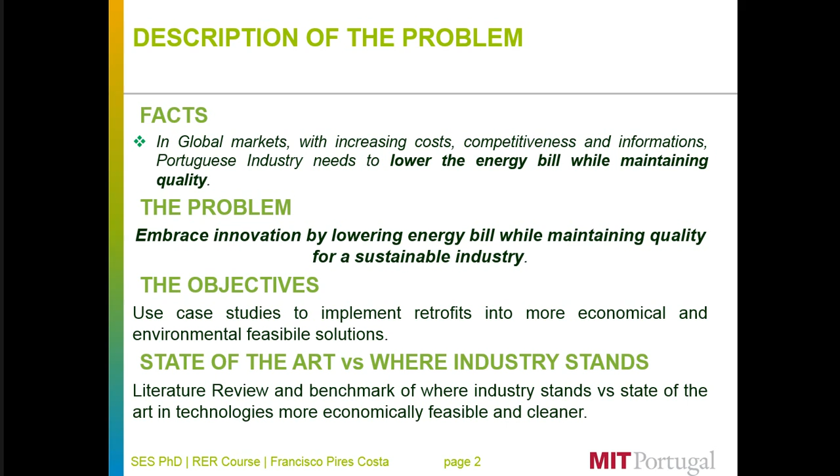Description of the problem: facts. In global markets with increasing costs, competitiveness and information, Portuguese industry needs to lower the energy bill while maintaining quality. The problem is to embrace innovation. The objectives are to use case studies to implement retrofits into more economical and environmentally feasible solutions, using state-of-the-art versus where industry stands to choose the optimal solutions.

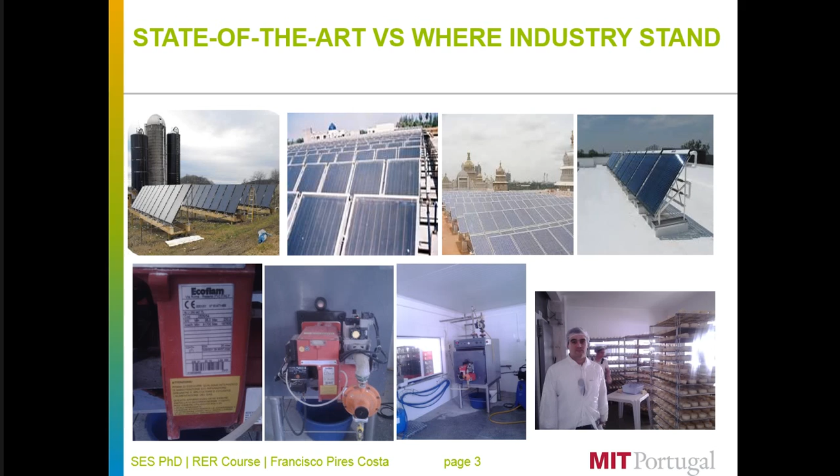The methodology involved choosing two case study analyses, technology benchmarking, net value costs and economical feasibility, greenhouse gas emissions for environmental feasibility, and simulation by manufacturer versus calculation for sizing validation. Conclusions.

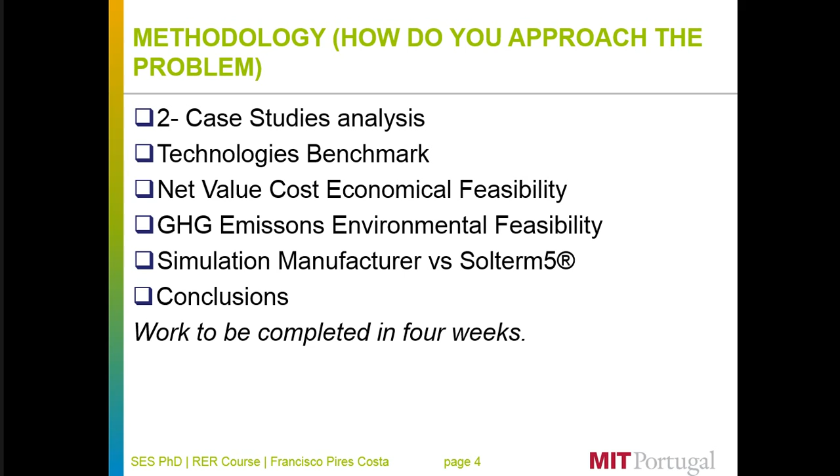We had to assess the industry in Portugal, mainly the industry with meaning in terms of micro and medium companies. Especially, we chose industries linked to rural areas.

Milk producing industry and cheese producing industry were chosen. For the milk producing industry, the representative case was Herdade das Pedras no Redondo, which uses electricity by Joule effect water heating to satisfy their daily hot water consumption needs of 5,000 liters per day at 60 degrees centigrade. Applications include milk tanks, floor, animal stable, and daily cleaning.

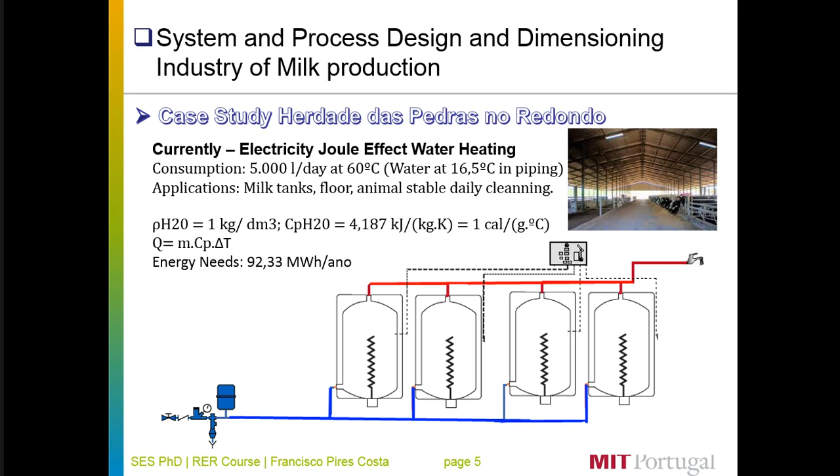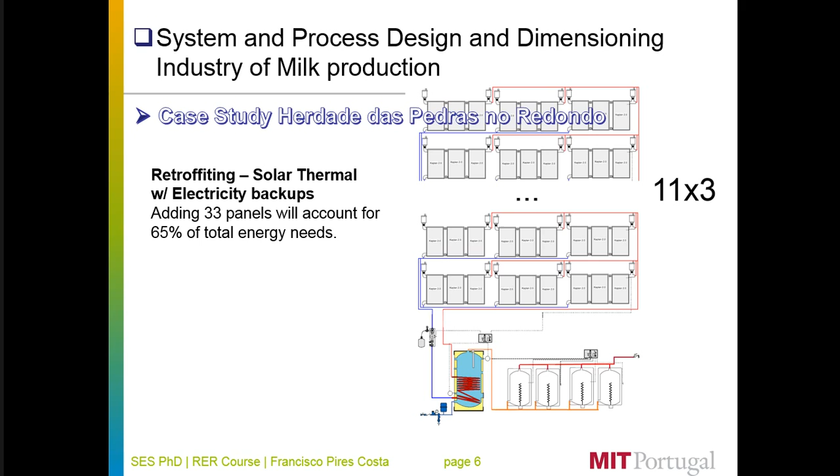The retrofit solution aims to add solar thermal panels that account for 65% of total energy needs, using the previous energy source, electricity, only as backup. So the system now works on a more renewable approach.

Regarding the other case study for cheese producing industry, it was represented by Queijaria Cachopas. Currently they use propane gas, liquefied petroleum gas, for water heating with the same consumption.

This consumption pattern is basically equal, not surprisingly, because as I saw in the field, although they are slightly different industries, the applications of hot water are basically for sanitation purposes, and this justifies the fact that the consumption levels are very similar.

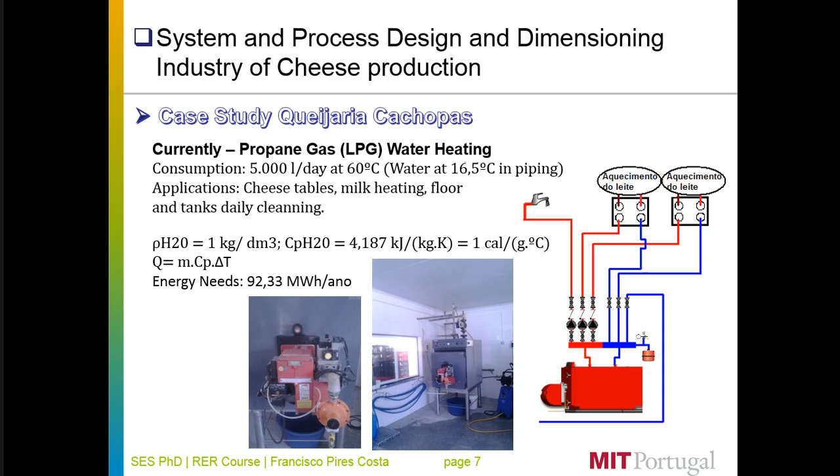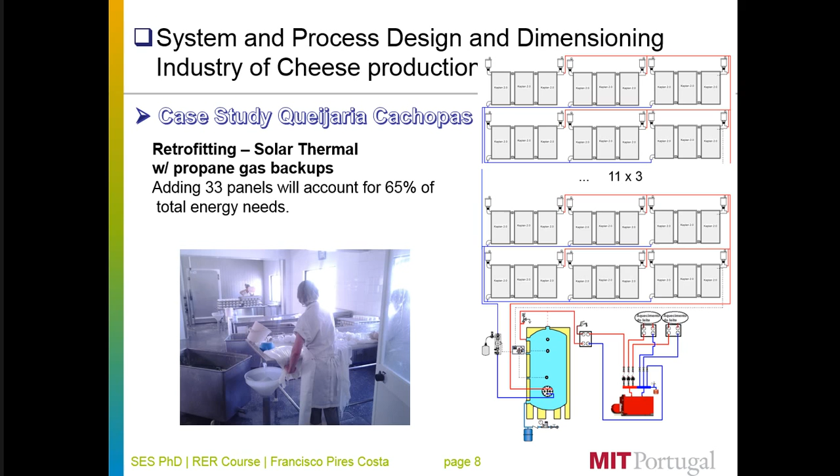Again, the difference is that they are using a propane gas boiler. The retrofit system would also add solar panels, accounting for 65% of total energy needs, with a backup energy source of propane gas.

So we have set the case studies that represent the desired industries. Now let's see the literature review, the available technologies, and how they behave economically and environmentally. The first technology to be seen...

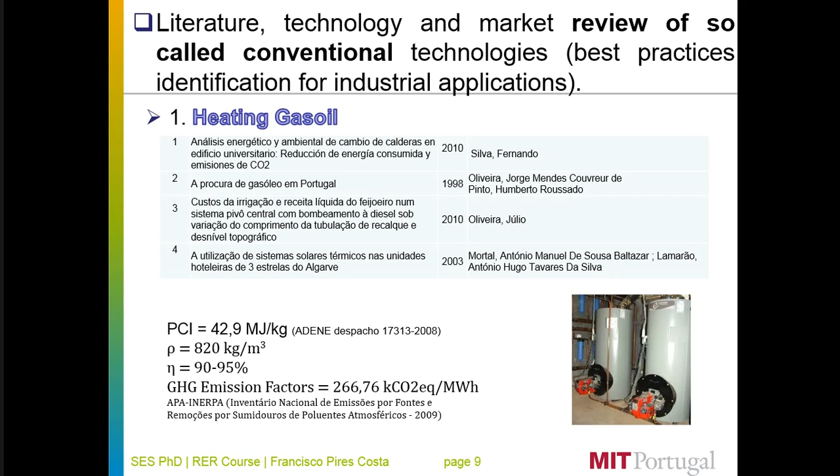is heating gas oil. For each technology, our approach was first a literature review, then making a data sheet with a technical view of the fuel involved and greenhouse gas emission factors, and afterwards the market and economic data.

For heating gas oil, we see that it's a good, well-known technology. From the investor's perspective, it's interesting because it has a considerably low installation and equipment acquisition price.

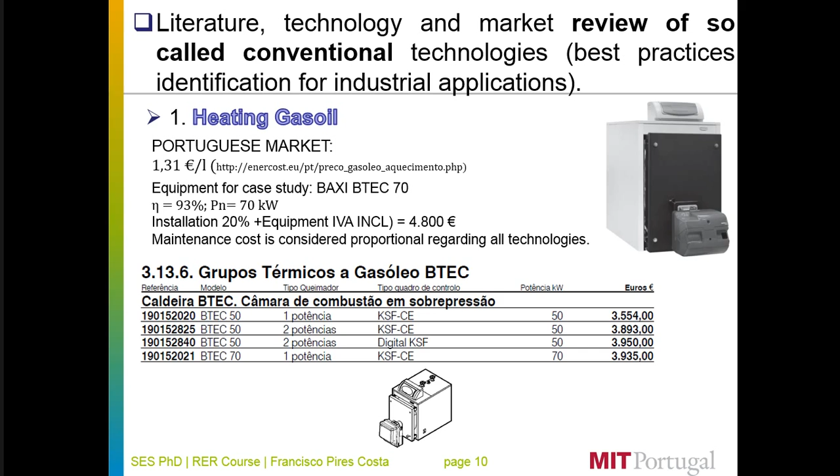Regarding propane gas, or liquefied petroleum gas, the literature review included Conceptos Básicos sobre el Propano by NREL, Department of Energy of the United States, 2010, and Study Measures Impact of Propane Gas by LP Gas, 2011. The lower heating value of propane gas is 46.3 megajoules per kilogram.

The volumic mass is 510 kilograms per cubic meter, with an efficiency of 90 to 95%. The greenhouse gas emission factor is 227.16 kilos of CO2 equivalent per megawatt hour.

Greenhouse gas emission factors were taken from APA-INERPA, Inventário Nacional de Emissões por Fontes e Remoções por Sumidouros de Poluentes Atmosféricos, 2009, and the lower heating value was taken from ADENE, Despacho 17.313, 2008.

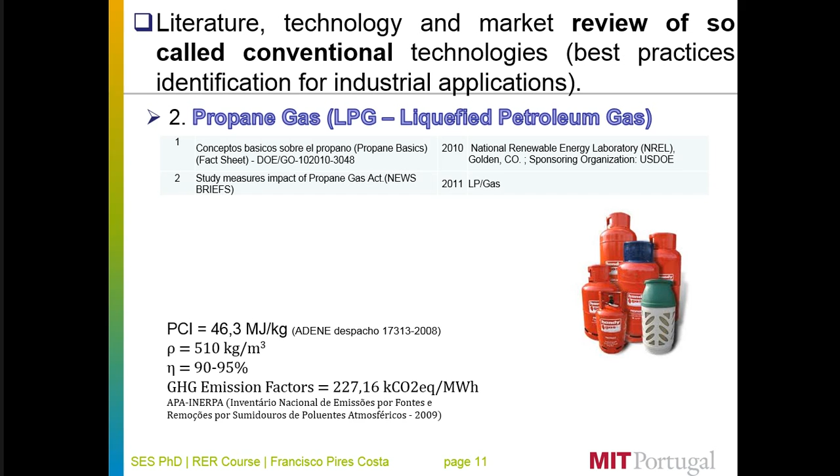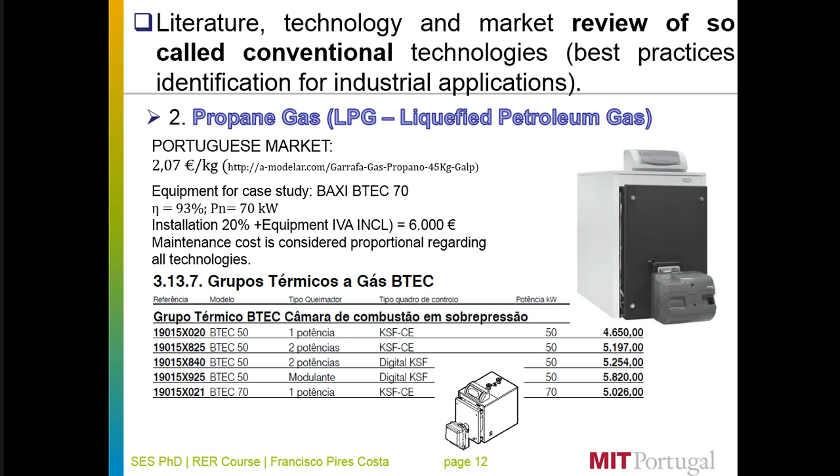Again, considering the Portuguese market, we see that propane gas can use similar equipment to heating gas oil, with a small change in the burner and other minor changes pursued to allow the use of this kind of fuel.

Natural gas was also studied. An interesting issue is that natural gas is a little less pollutant than heating gas oil and propane gas. We see this because the greenhouse gas emission factor for natural gas is 201.96 kilos of CO2 equivalent per megawatt hour.

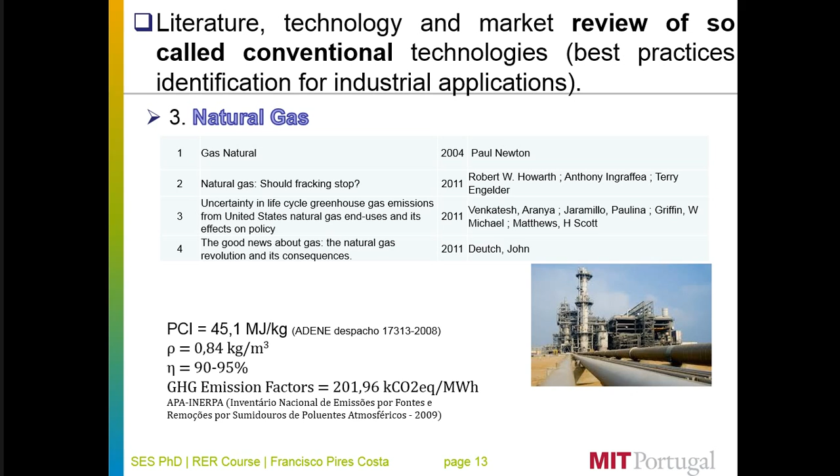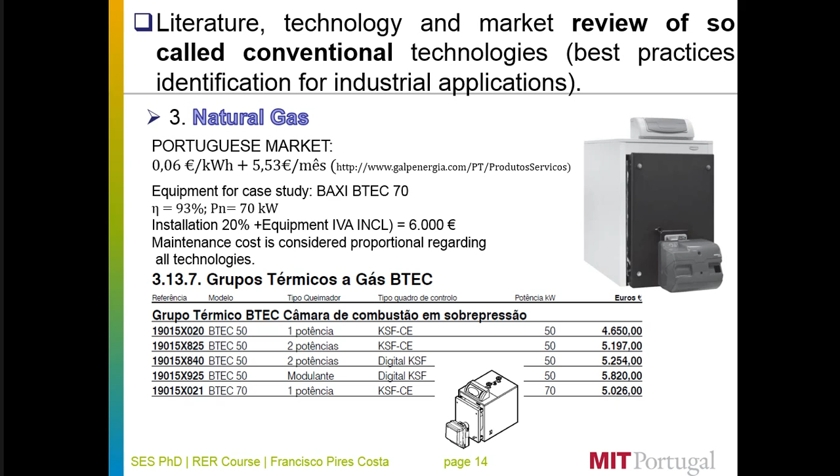A particularity of natural gas is that it can cost very cheap, and the equipment is again fitted to have natural gas.

Natural gas can and should also be considered in comparison with a natural gas condensation boiler, since the condensation boiler allows taking advantage of the evaporation heat of water that would otherwise be lost, since the condensation is taken back into the system by the condensation boiler. So the higher heating value can be used, but for calculations we can mostly use the lower heating value.

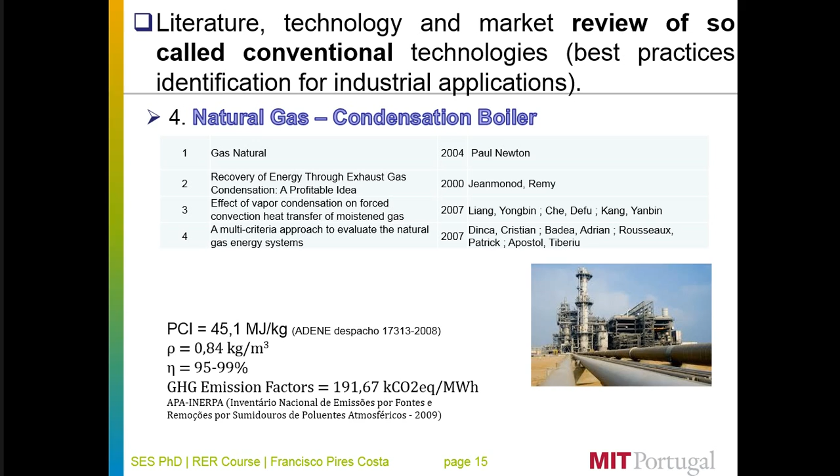The efficiency is, as expected, higher with the condensation boiler, and the greenhouse gas emission factors are also lower than plain natural gas.

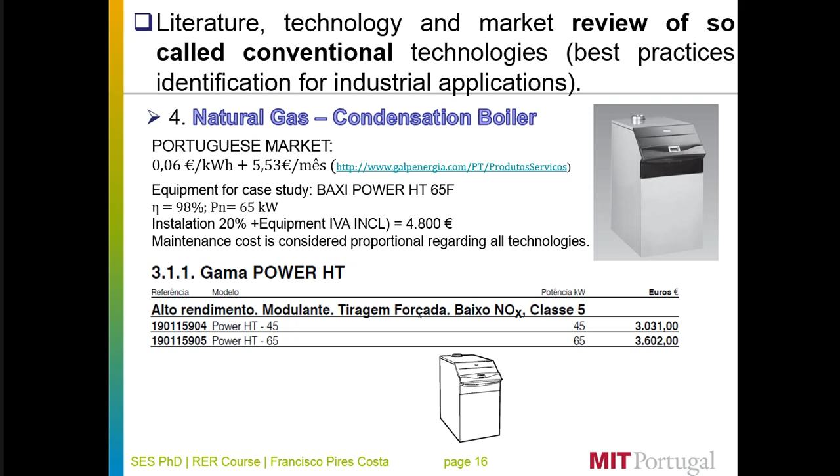The condensation boiler has the following aspect, and we can see that it's not very expensive, not much more than the natural gas boiler. Regarding the condensation boiler price, it was important to see that the powers involved were slightly different, which justifies a small difference in price.

Overall, we can say that condensation boilers are a little more expensive than plain natural gas boilers.

Regarding electricity water heating by Joule effect, we have the properties here, and the thing to call attention to is the greenhouse gas emission factors, which in electricity, as expected, are very high, reaching 375 kilos of CO2 equivalent per megawatt hour.

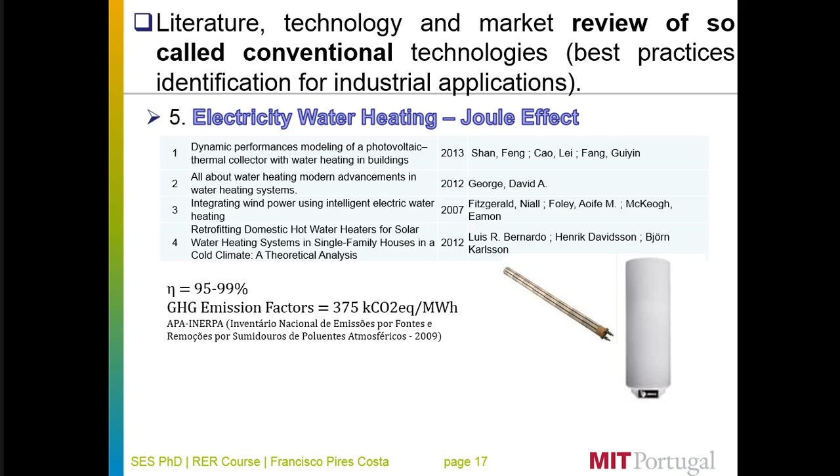In the Portuguese market, we have here the tariffs given by EDP Serviço Universal.

We chose 4 cylinders, accomplishing 40 kilowatts. Since electricity is always working, this was basically what was needed to fulfill the daily needs of hot water.

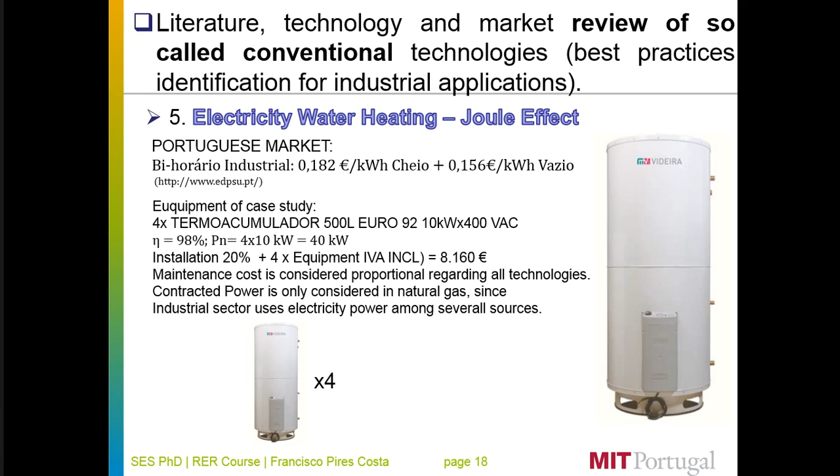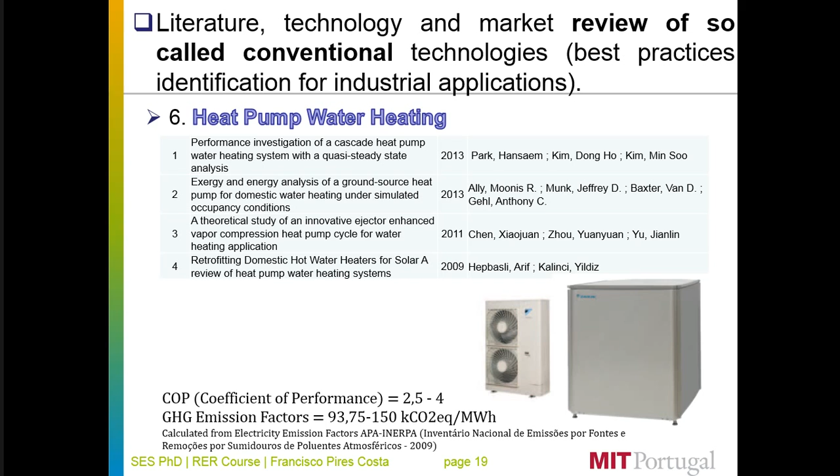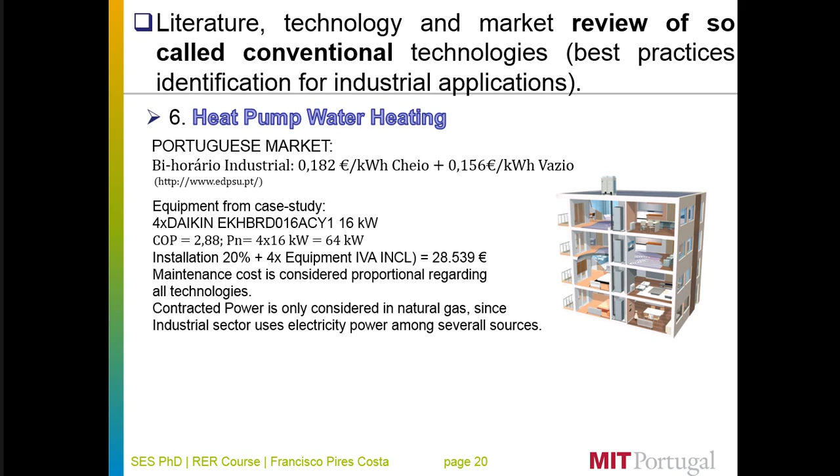In this technology, we have a heat pump for water heating. Heat pump for water heating is a surprisingly good performance technology, with COP, coefficient of performance, between 2.5 and 4, and greenhouse gas emission factors between 93.75 and 150 kilos of CO2 equivalent per megawatt hour. The heat pump uses electricity, but it's highly performant. The problem with this technology is the initial price, working capital demanding, with a cost of 28,539 euros considering overall costs.

Biomass. Now we have already listed all the so-called conventional technologies, which are heating gas oil, propane gas or liquefied petroleum gas, natural gas with boiler or condensation, electricity Joule effect hot water heating, and also heat pumps. So now we are moving to renewable energies, or the so-called non-scarce, non-fossil-fuel-dependent energies.

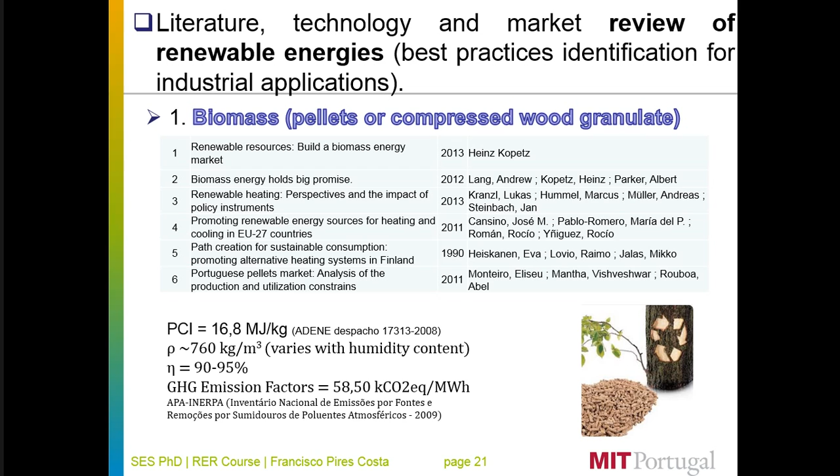Renewable energies studied are mainly biomass, which are pellets or compressed wood granulates. The thing about biomass is that greenhouse gas emission factors are very low, at 58.50 kilos of CO2 equivalent per megawatt hour. Biomass has high initial costs, with equipment costing 13,800 euros, being less expensive than expected compared to heat pumps.

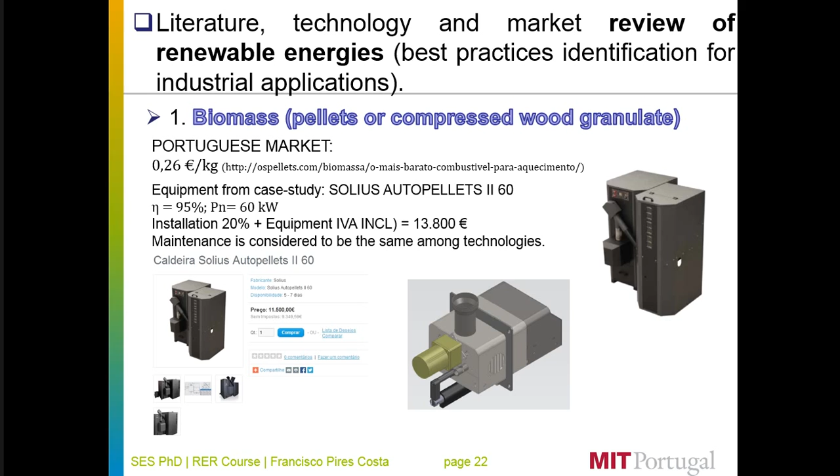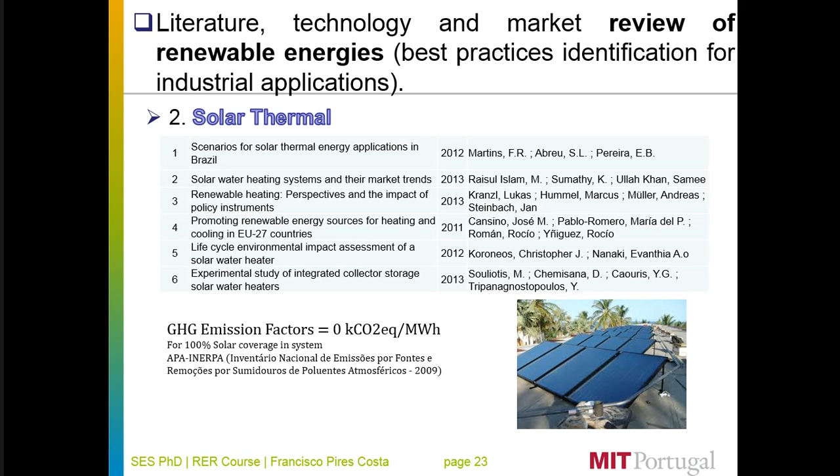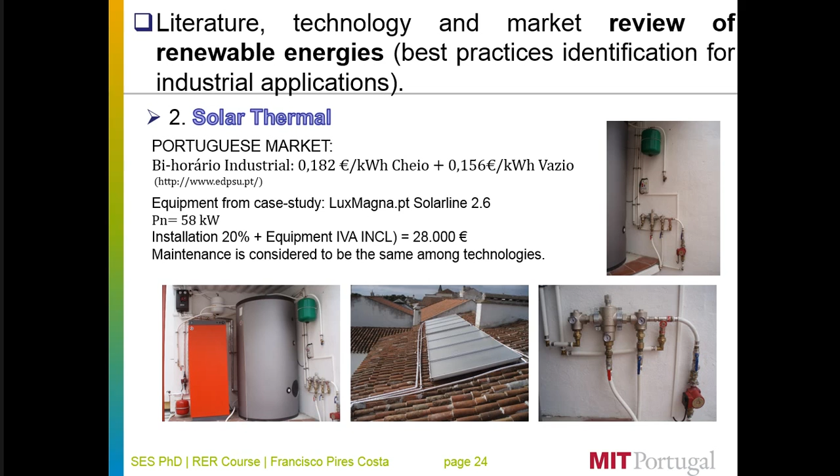Solar thermal, the second renewable energy technology, has no emissions if we consider 100% solar coverage, which in reality is very hard and expensive to obtain. So in practice, we suggest, as in the retrofit, performance between 60 and 80%, up to 90% solar coverage, with the rest supplied by an alternative form of energy. Here we have the accounted-for system. Again, it's working capital demanding because solar thermal and renewable technologies are initially expensive, but what pays off is the overall variable costs being very low. So here is the proposal of solar thermal.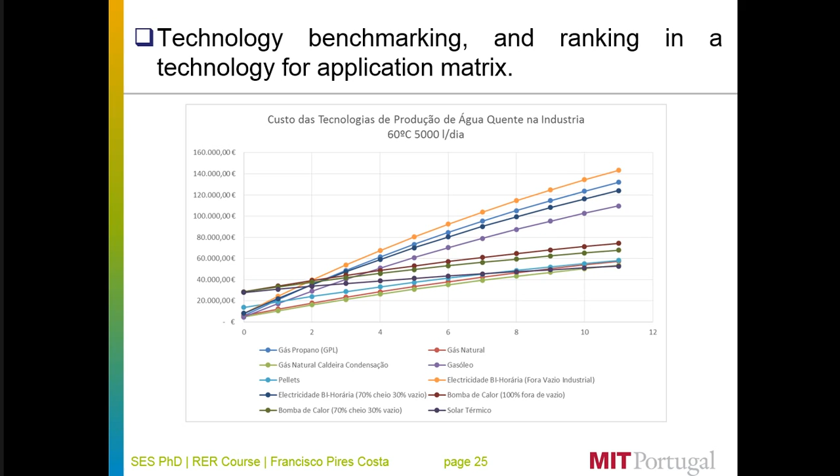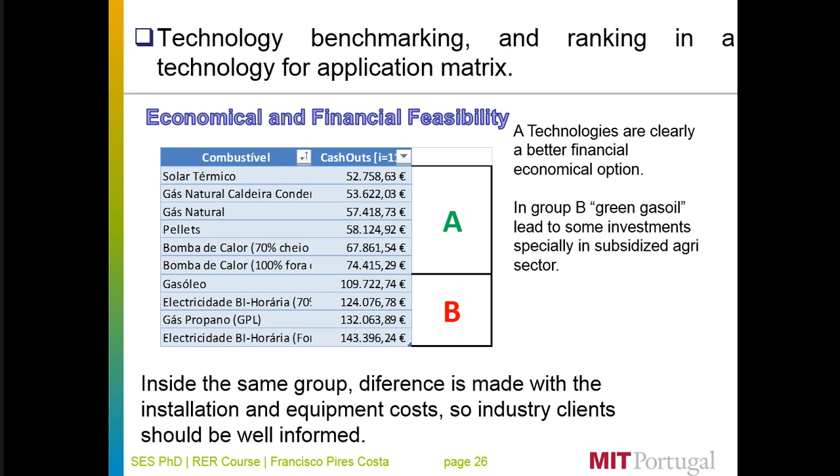Regarding the calculations, we used net present cost as the criteria for technology benchmarking and ranking. Solar thermal technology yields the lesser net present cost, closely followed by natural gas and pellets. So these are the technologies to go for. Electricity and propane gas are very expensive technologies that should be, as soon as possible, changed and retrofitted to cleaner and cheaper technologies.

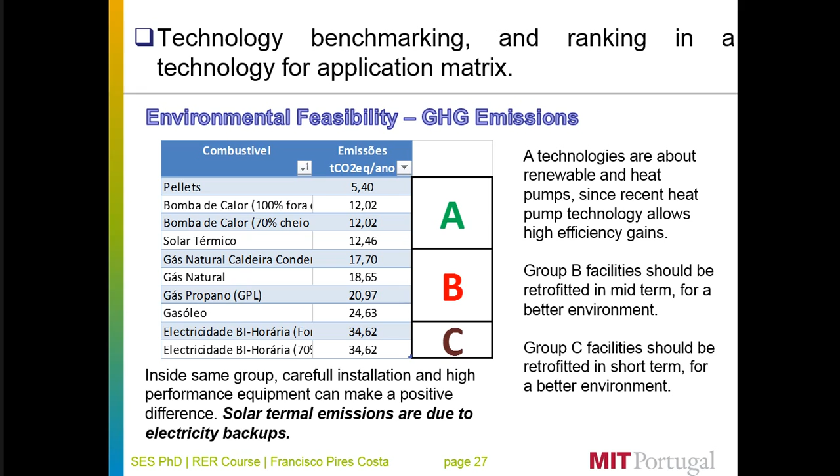Regarding environmental feasibility, interestingly, we achieve common conclusions that the same technologies which are cheaper are also greener. Solar thermal, pellets, heat pumps, and natural gas are cleaner technologies, which also correspond to the lesser net present value technologies, so they are the technologies investors should go for. One important aspect is that solar thermal has emissions associated because there wasn't 100% coverage. We used solar coverage of 65%, so the remaining 35% of energy necessities are supplied, in the case of the milk industry, by electricity, and in the case of cheese, by propane gas.

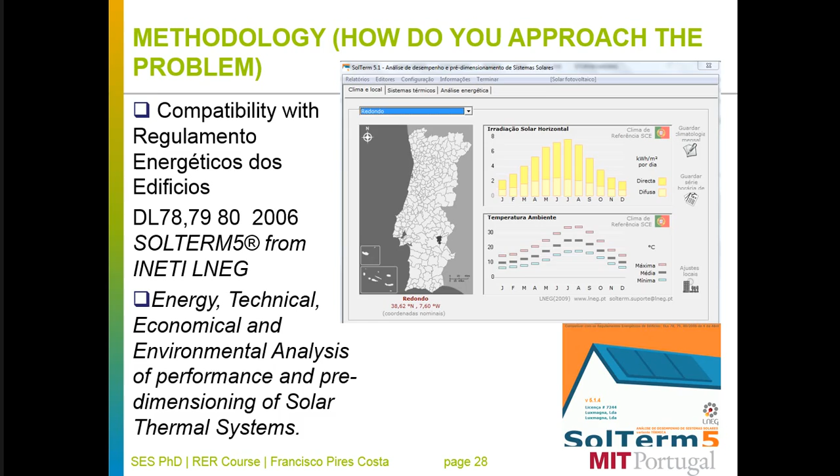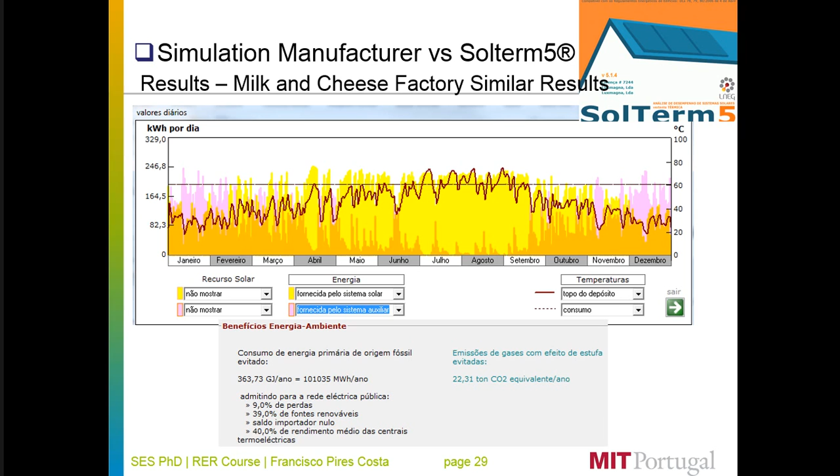The methodology for the retrofitting and for the overall system was validated using software compatible with the Regulamento Energético de Edifícios, Regulamento de Características e Comportamento Térmico dos Edifícios, by Solterm INETI. This software is for energy, technical, economic and environmental analysis of performance and pre-dimensioning of solar thermal systems. The simulation obtained in this software was similar to the results manually calculated, and this was important because it validated the study.

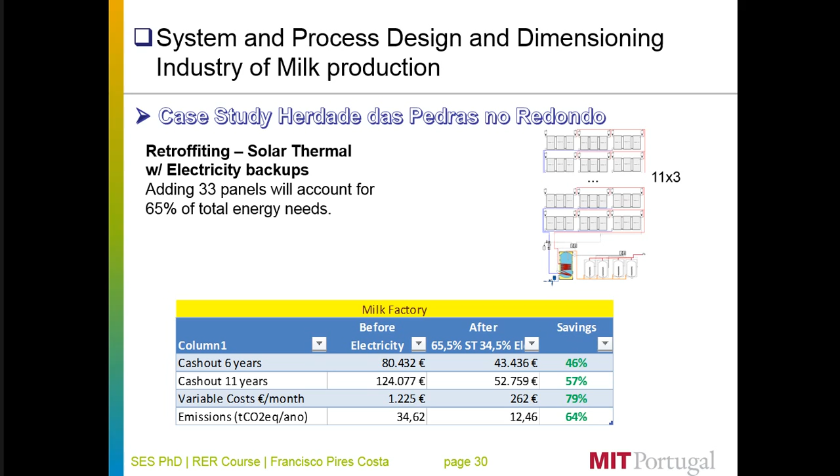Regarding the results, retrofitting the Herdade das Pedras no Redondo milk producing industry will yield savings of 46% in 6 years, 57% in 11 years, with variable costs decreasing and emissions decreasing 64%. Regarding Queijaria Cachopas, the retrofitting will yield 50% savings in 6 years, 60% savings in 11 years, variable costs decreasing by 80%, and emissions reduced by 41%.

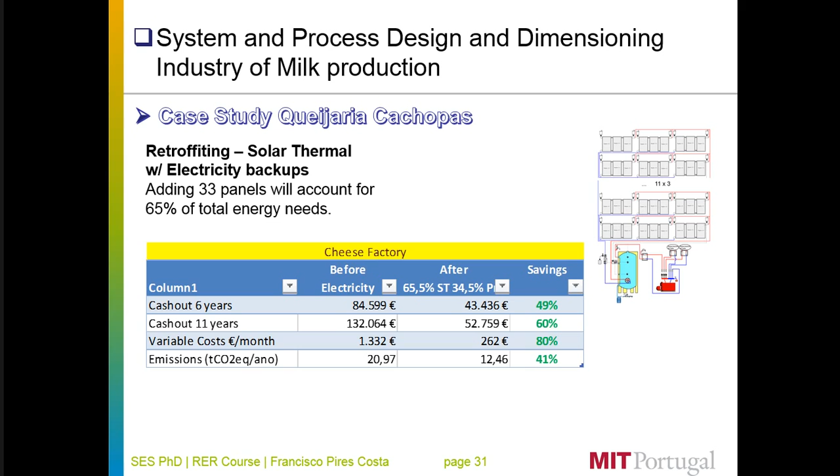So the results attained versus what we set out to achieve clearly completed the goals initially set. Our objectives, set at the start of the work, were fully accomplished: savings were obtained, and retrofitting both the milk industry and cheese industry to solar thermal will yield savings in CO2 and costs. We see CO2 savings in water heating of 64% for milk and 41% for cheese, variable energy costs savings of 79% for milk and 80% for cheese, return of investment of 2 years, and validation with the software attained similar results. The technical sizing of the system was validated because Solterm allows quasi-stationary simulation analysis, and the solar production and overall production fits the production we calculated.